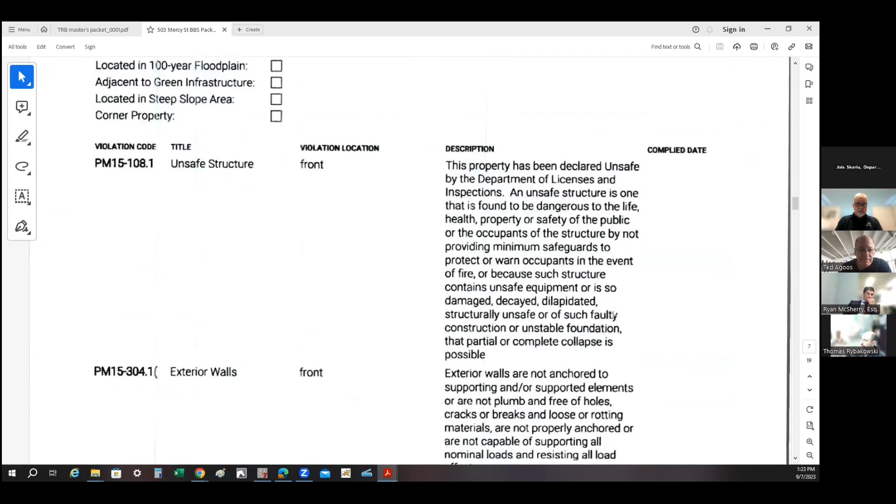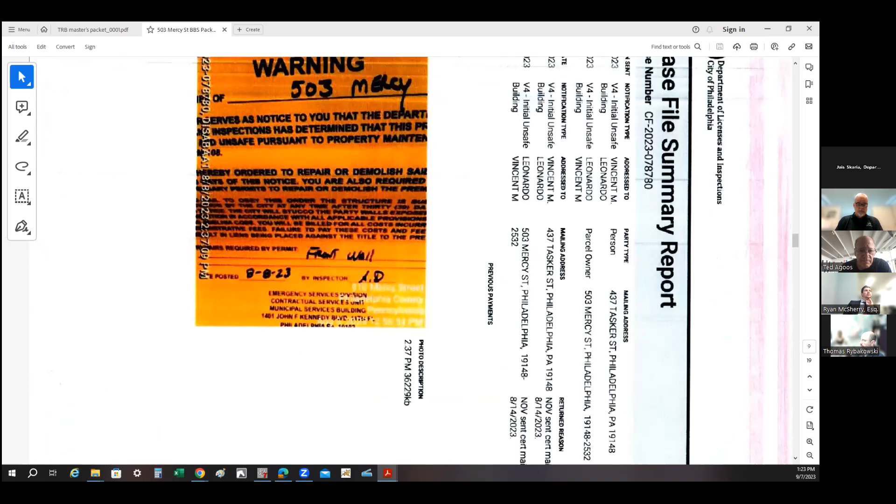That's a copy of the posting of the front of the property, 503 Mercy. And then this is a photograph of the front of the property. Like I said, it's very hard to show a bulge in the front of a masonry wall. But there is a bulge in the wall that was observed by the area inspector.

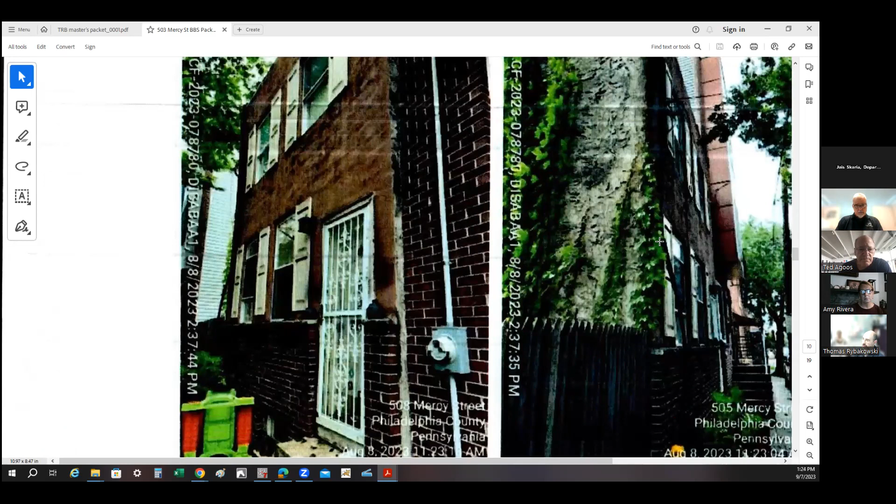In fact, the area inspector did speak to the occupants in the property at the time that the notice was posted at the property. Like I said, we would be looking for the permit for the repair or the engineering report illustrating that there is no unsafe condition within 60 days. With that, I'll rest for the time being.

Vincent, do you want to kind of respond to that or have us clarify? I just wanted to clarify that he did not speak with us the day of the violation. We were actually at home, and he provided the violation without even making us aware of it. Once I got the violation, I called him, and he wasn't in the office, so I had to call the next day, and then I just wanted to clarify that point. But yeah, I'm happy to. I prepared a statement. I'm happy to read that off if that's appropriate.

Yeah, you can certainly do it. I guess just, given what you wrote in your appeal, this is something that we do need to have an engineer make the determination of whether it is or is not an unsafe condition. So are you prepared to engage an engineer and have them come out and do it? We can't just. Well, my understanding is you guys need a preponderance of evidence to make this assessment.

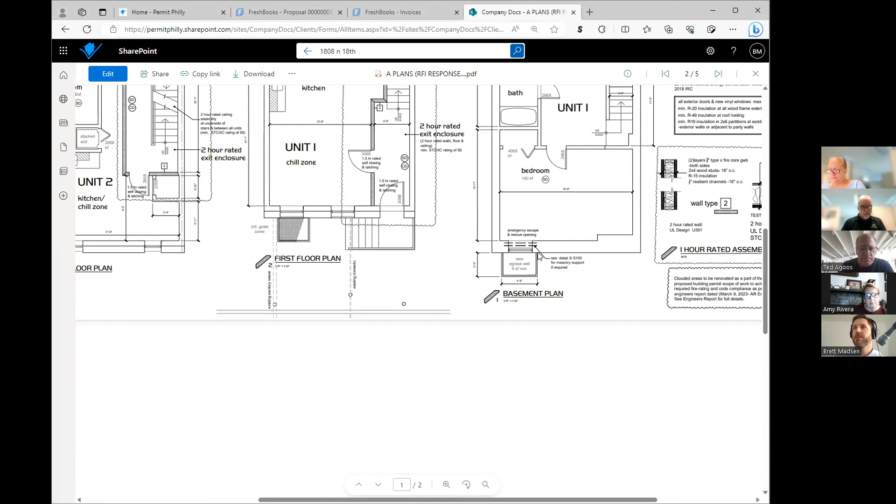This is what had to be changed. Previously, this enclosure was not properly rated. You can see that all through the corridor here, here, and here. There was also an egress well, a new egress well proposed for the basement bedroom. Essentially, everything else has been laid out this way for some time. The big change that I mentioned, the bay window, is over here.

This is on the second floor, I believe. Yes, second floor, and these are the new walls. It's very similar to the bay window that was there before, but the square footage is slightly different. That's the only change in floor area.

And that bay does not extend beyond the third floor nor the first. So this side where it says second floor plan is the front of the building. So this is actually within property lines.

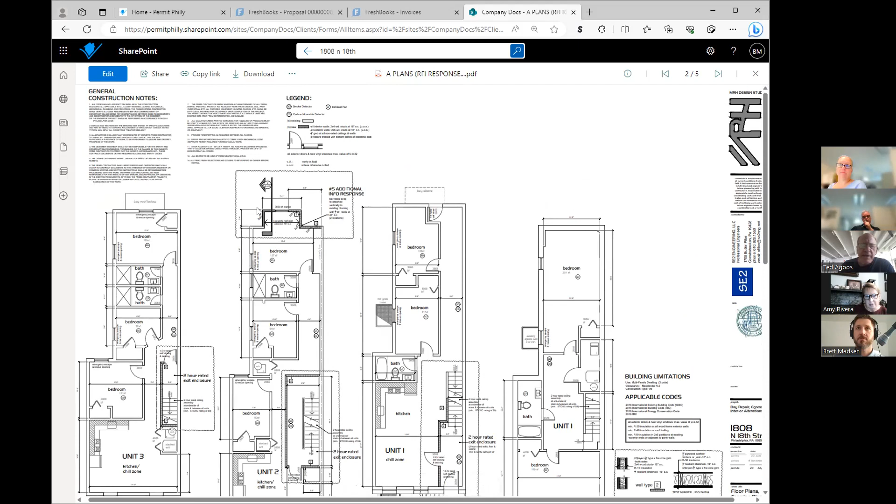It's over a parking area. But assuming all three floors are lined up, it looks like it does not go out any further. Yeah, the plans aren't aligned, so that's why. I didn't know if the front maybe doesn't align with the front. No, Ted's correct. So we have the third floor here, right? You see the frontage? It's dashed in, dropped on one side for some reason. I didn't draw the plans, I'm sorry. And then raised back here, but the distances are all the same, just placed slightly differently.

It's also worth noting, I'm not sure if you have this in the records, but this was brought to you before. At that time, the architect had a note that sort of allowed them to see if the assemblies were fire rated, and if not, cover them. The Board of Building Standards requested that we make a determination, have an engineer look at it, determine whether or not the existing assemblies were 2-hour fire rated or whether they needed additional protection. And they definitely need additional protection. So that's changed from the last time this was presented. There will be 2-hour fire rated drywall installed all along the walls of the exit corridors.

So the refusal only says an existing fire area increased by the addition, which I believe is the bay. Shall comply with Chapter 9 of the International Building Code. Yeah, that's correct. So that's not that we're here to talk about egress wells.

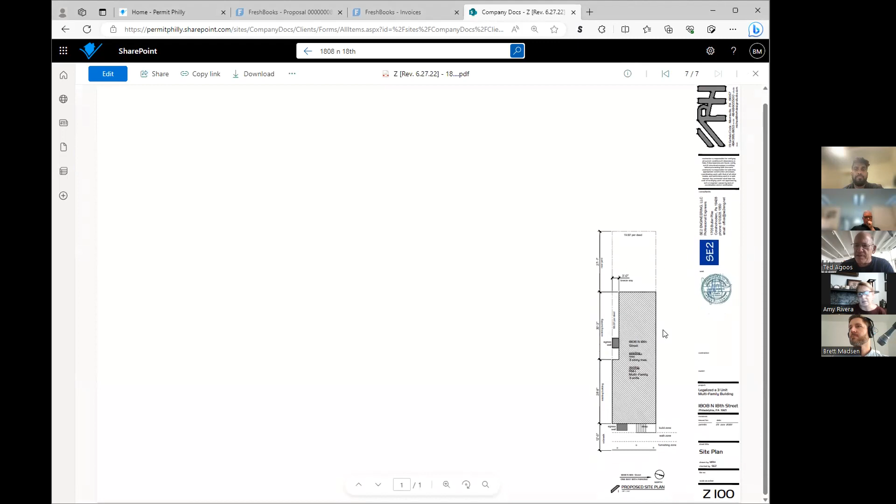Honestly, this one has been going on long enough that I forget. Let me look at our permit documents here, because what I see, this refusal only says because of the addition - it's an increase in the fire area because of the addition. Yeah, that's correct. We're not trying to legalize it - I was going by what Brett was saying, but my system is back up and running, so I'm just going to double check to make sure.

And just a question, if you can multitask, Jace - if this increased the fire area, would that require just the increased area to be sprinkled, or the entire building? If they don't separate it, then the whole building needs to be sprinkled.

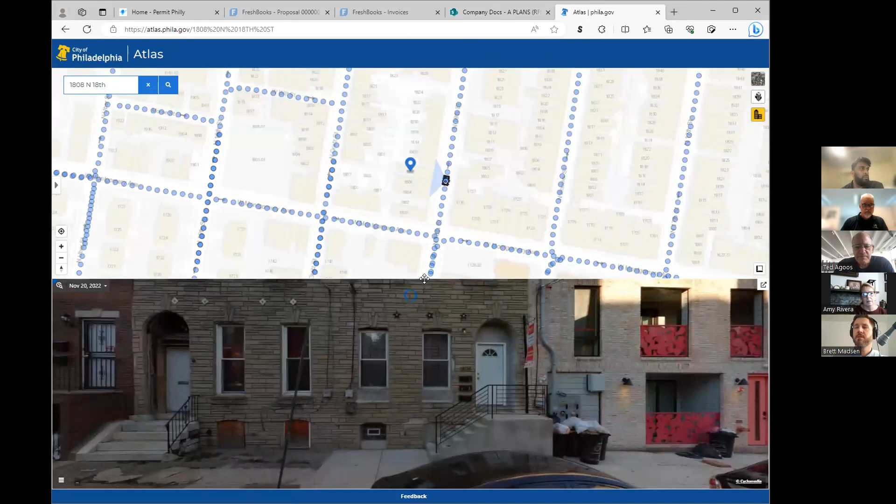Well, that's why I'm asking to see pictures, maybe from the backyard, of the bay before it got torn down, and then the reconstructed bay. And do we have historic photos? Luckily, they are easy to find on Atlas. Let me pull up the rear view - actually, because there's an open area back here, you can see, yeah, so this is our 1808 right here.

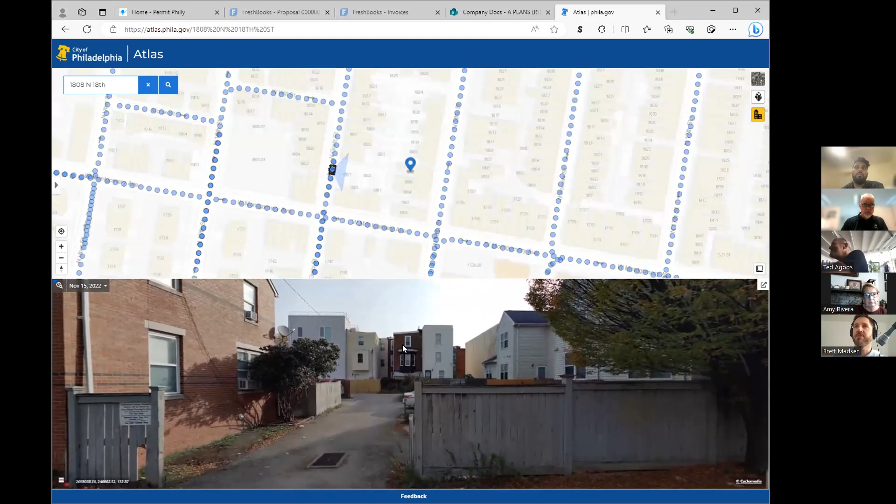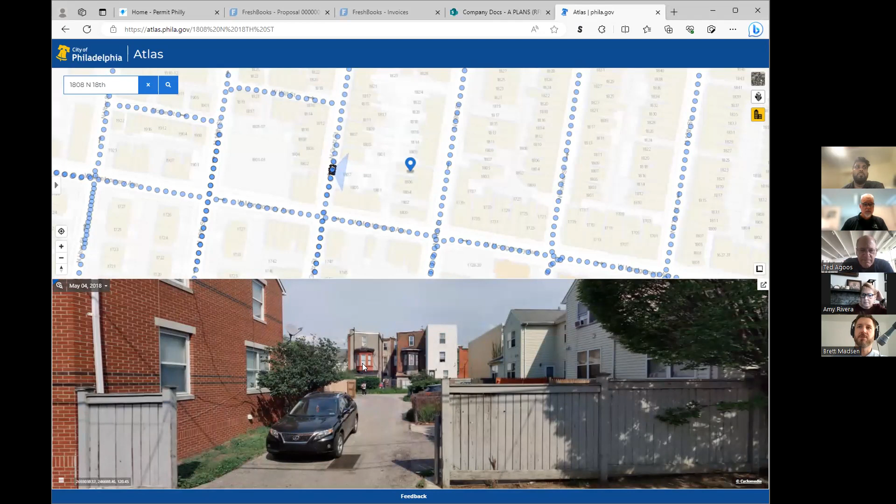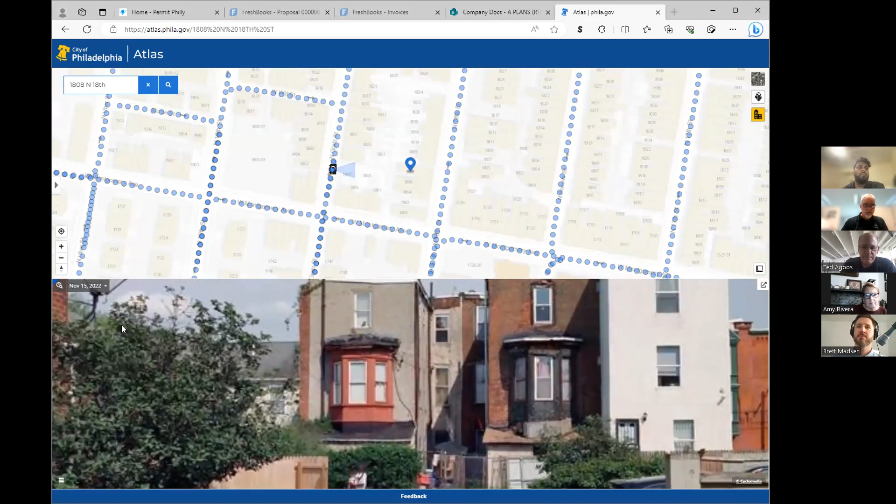The previous zoning permit says that the new bay window is actually larger than the previous one. That's what it says in the zoning. So it doesn't look like it, but it works out to a little bit more square footage. Does it project further, or is it the same projection? It's just that it's squared off, so it's a little more area.

It's squared off, so it's a little more area, and I think it might be slightly longer. I haven't looked at the zoning plans in a while. Sorry, I was prepping for the building portion here. I can pull those up if you want, or look at the approved zoning plans we have. It doesn't look like a very significant projection if it's not.

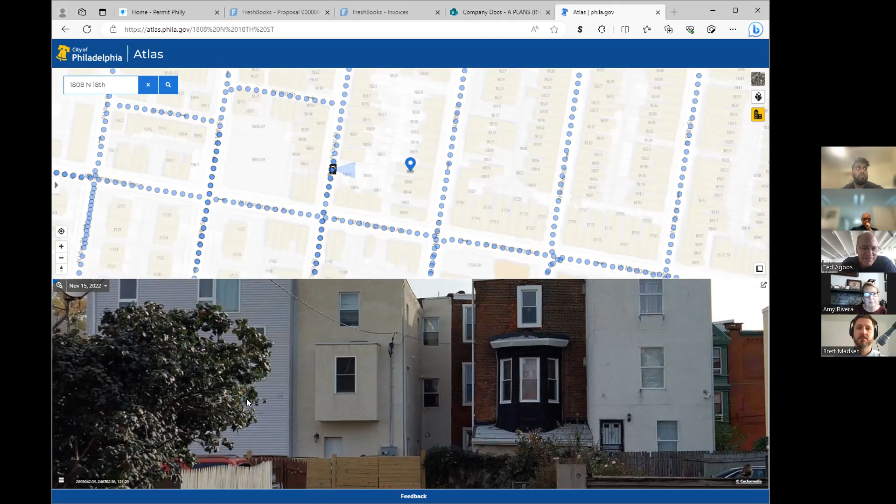It's not. The changes in all dimensions were pretty minor. And you reduced area on the first floor. You took off that shed off the back. Yeah, that's correct. So now here's our first floor here.

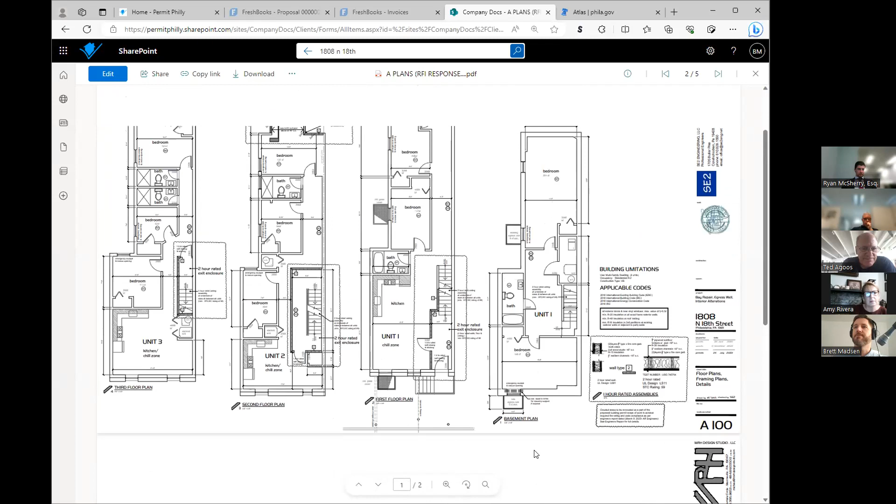There are previous permits on file showing a bump out on the third floor level. I'm guessing that scope was canceled and the new scope was just for the second floor. Correct, Brett? Yeah, there's only a bump out on the second floor. There's no third floor bump out proposed here.

Yeah, it looks like it was previously issued out as a 3-family dwelling based on the previous zoning issued in 2022. So all it is, is just this little bump out on the second floor level. Technically, it's an addition, so that's how.

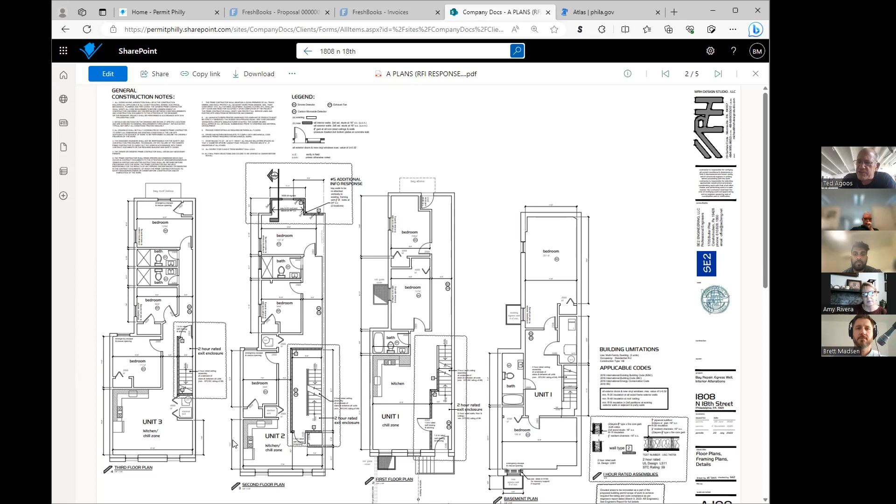Could we talk this through, or John Dimes, do you want to chime in anything? So if I understand this correctly, that bump out is the addition? Yeah, that's correct. That small little bump out, that's what's triggering the sprinkler system? Yeah, yep, that's correct.

Yes, the bump out replaced an existing bump out. And this is an existing building, nothing else is being done, and they're proposing to add fire rating between units upstairs? That's correct. Yes, on the corridors, yes.

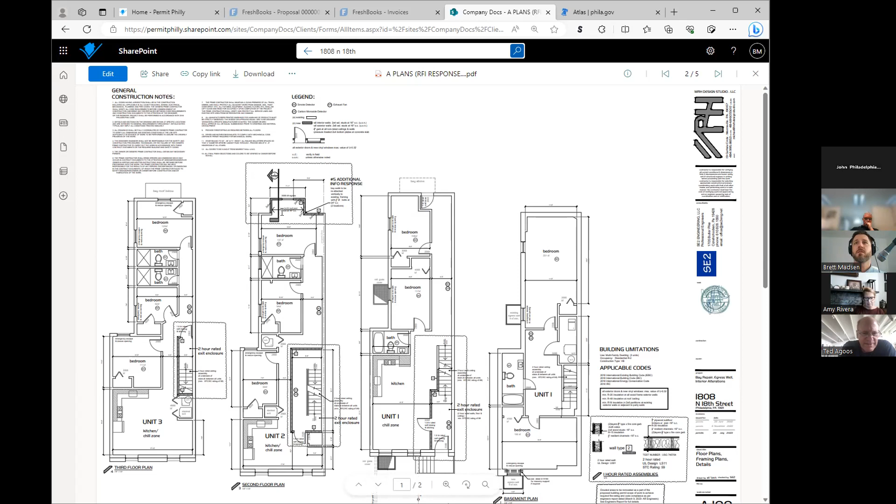And what's the square footage of that area? Of the bump out itself, or the one which is triggering the actual call for the sprinkler? It's about 28 square feet. Yeah, 24, well, maybe.

And John, what was there before? A window bay. Yeah, there was a bay window. And with the overall truncated corners, yeah, they've probably added 5 square feet total.

Right, yeah, I wouldn't be adverse to anything the board wanted to do. I would be fine with it, given what it is, and it's an existing building, and it's such a small addition, I think it's negligible in its effect on the property as it currently is.

It isn't like they're adding on a room or anything like that, so. And I tend to agree that it's really just replacing a bay. Yeah, I would as well. I think I'm comfortable with this.

We grant a variance to relieve them from the sprinkler system requirement for this small addition at the rear. Right, and that's the only cited item, correct? Yes. Okay, well, what happens is I think we make the recommendation to the commissioner.

And if he concurs, you should hear in a couple of weeks and get a decision letter. And the plan examiner will at the same time. Okay, that sounds great. Thanks. Thank you. Thanks for joining early.

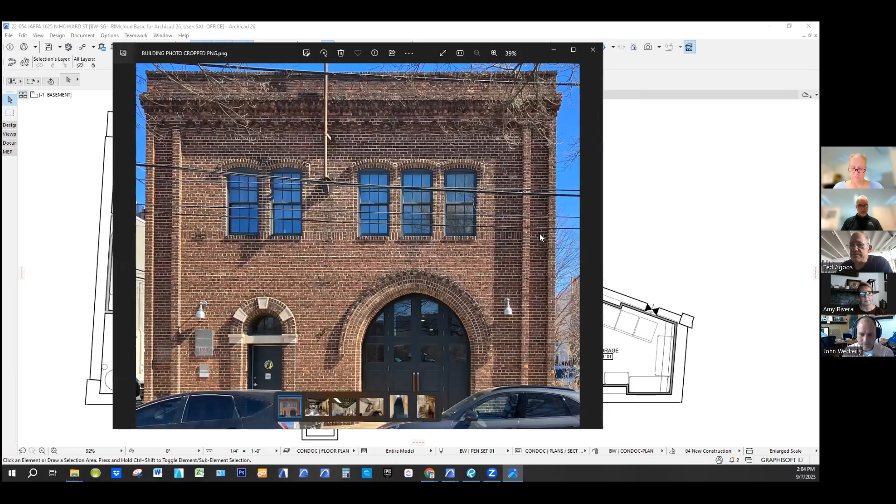So just wanted to start with some background information to show some existing conditions, photos of the property. This is a view, as many may know, it was originally a firehouse that has had a number of previous uses. Most recently, when we started working on the project, it was zoned for assembly or restaurant use on the ground floor and was operating as a business on the second floor.

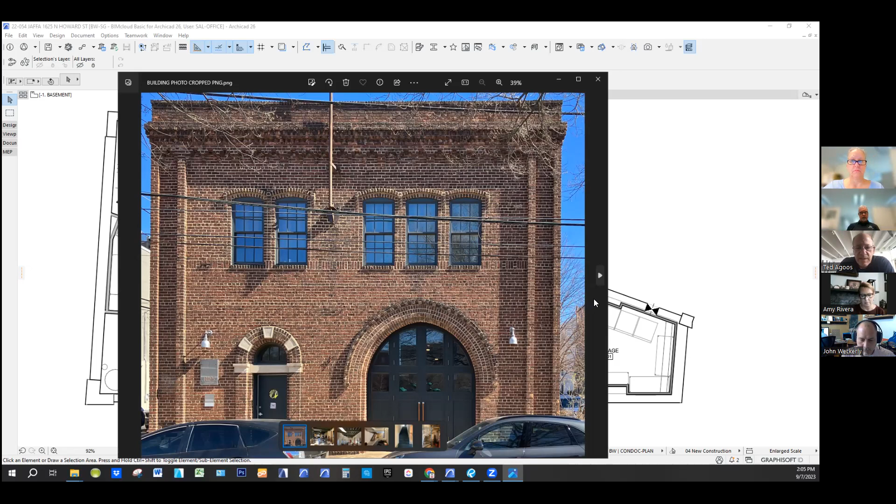So this is the view on the west side of what was the original access point for the firehouse. This is the view on the inside looking west, so you can see the garage door that was in the previous photo off in the distance there. Kind of to the right of Sal, and behind him is the existing stair to the second floor.

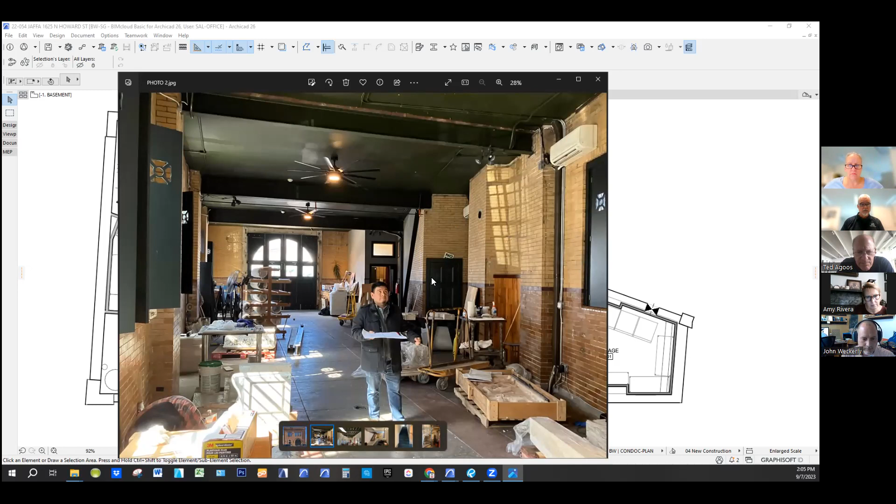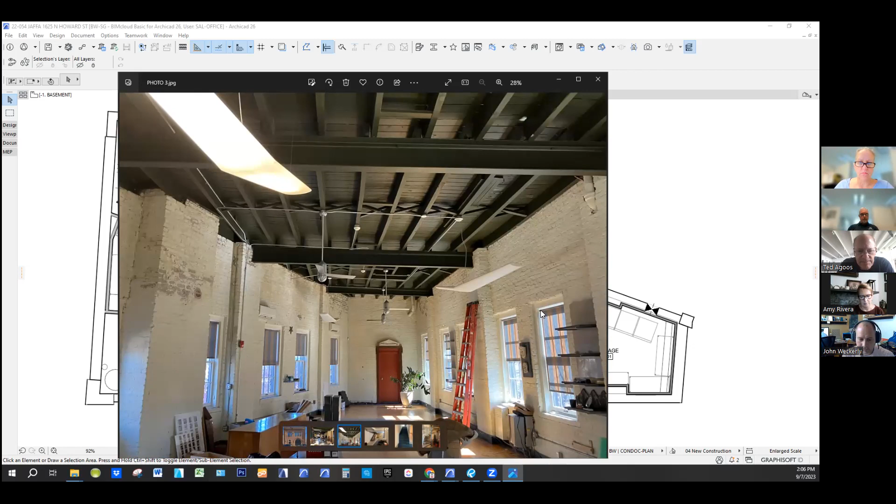This is just the overall context image. And then this is a view on the second floor. Kind of once you come up the stairs, this view is actually looking east towards the more narrow portion of the existing structure. That red door at the end provides access to a stair, a spiral stair that gets you to the roof, but does not go down to the first floor, which we'll look at later in the plan.

And then this is a view showing the basement and the existing stair that leads from the ground level to the basement level. Is that everything, Sal, on photo? And then this is a photo of the first floor stair that leads to the second floor, the existing condition.

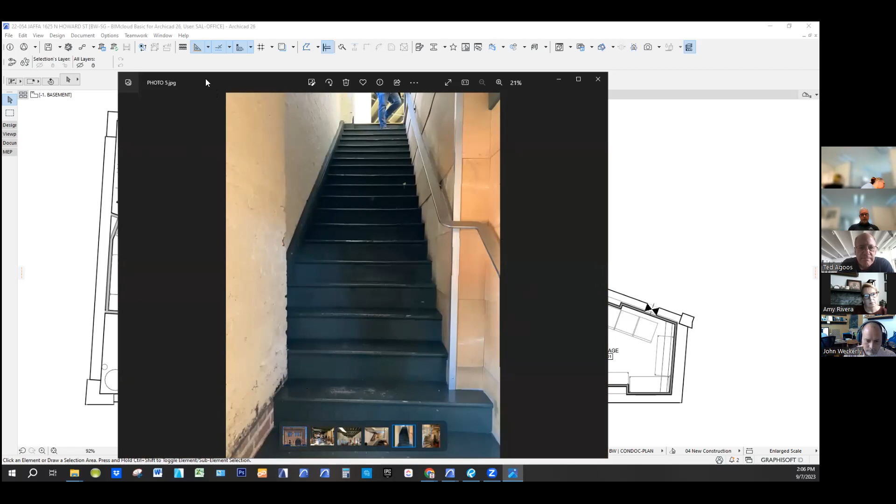The refusal and appeal is a bit of an overlapping request based on the unique shape of the existing structure, which led us to work to resolve how the customer and the operation would move through the space both vertically and horizontally, given the unique shape of the building, as well as the location of the existing entry points to the building.

The plan in front of us now is a plan of the proposed basement level. There is, as you can see here—let me annotate this, sorry. So this is the point with which you access the stair to go up to the first floor, which you'll see in a minute on the first floor.

There is, for reference, an existing access point to a Bilco door on the basement level that is at the second location. There's also another Bilco door that lives behind this restroom that we're proposing there for reference. And then I believe, lastly, there was this well here—over in this corner, I believe it was a coal chute or something to that effect, that is existing in its condition and I believe floored over at the sidewalk level.

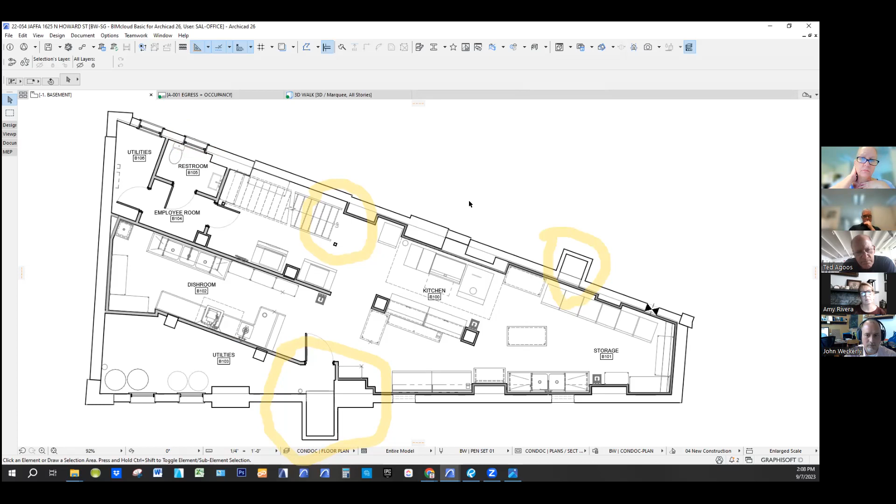And then just a bit of operational information: utility area in the lower left, where the utilities are being proposed either to come in or are existing. We're showing the sewage ejector pit location as well as the Oilmatic fryer tank in that corner.

Dish room directly above it for dishwashing. Immediately to the right, you can see the main kitchen area where the hood would be located, along with refrigeration and prep area. And then in the upper left-hand corner would be an employee restroom, and additional space where the existing electric panel is, in that top northwest corner.

What's the maximum number of people who would be working in here at any given time? On our permits that were submitted, we have nine occupants in the basement as a maximum allowable.

So moving to the first floor, you can see here where I had referenced the basement starts, going up. This is the access point to the basement from the first floor down. And this is our proposed access point to the second floor in terms of the reconfigured stair to the second floor.

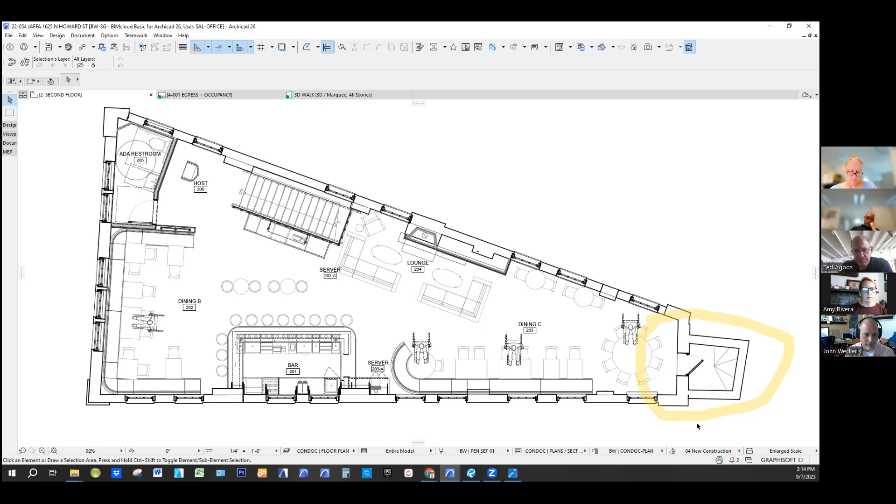Overall square footage of each footprint is 1,500 square feet of usable square footage for the basement, ground floor, and second level. Occupant load on the first floor is 59, and occupant load on the second floor is 71.

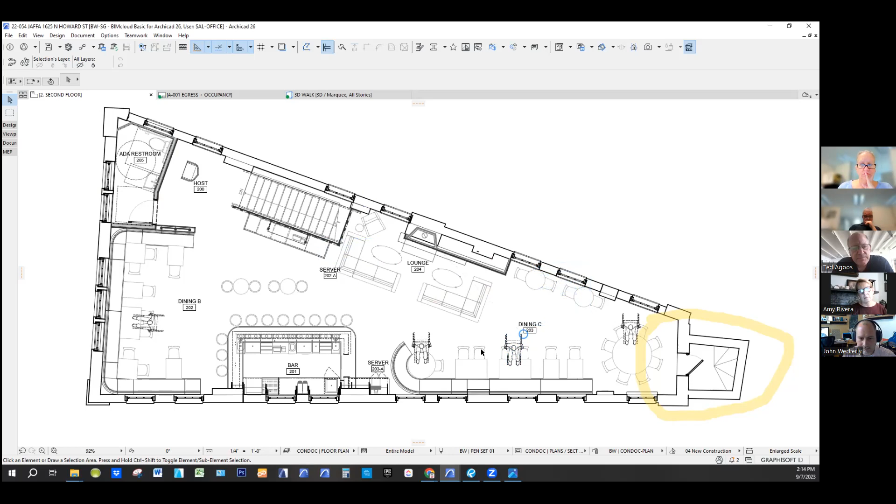We're requested, so the refusal is based on the fact that it's an interior. In essence, we're proposing to reconfigure the existing stair to create, from an ADA perspective, a code compliant 7-inch rise, 11-inch tread communicating stair, flipped the other direction from the way it is now, to include a landing from the first floor to the second floor.

The client's goal, as you can see, is one of the reasons why the language in the refusal is based on the stair being open from the basement, first floor, to second floor. As you can see in this area, the goal for the client was that since the kitchen lives in the basement, their operations is such that both culinary product and dirty dishes will flow vertically up and down through that location, which the hope was could stay open in an effort to make that process more seamless in terms of employees passing, both coming up the steps and going down the steps.

Sal and I were discussing whether there would be an opportunity to have a door on a magnetic lock, pinned to the fire alarm, to enclose that stair to the basement while at the same time allowing it to be open operationally, but closing if need be, to create a condition where we no longer had an open stair from the basement to the second level, but rather an enclosed stair from the basement to the first level, aside from operationally the door being open, minus a life safety event where it would close automatically. As you can see from the shape of the building, our hope is to have this.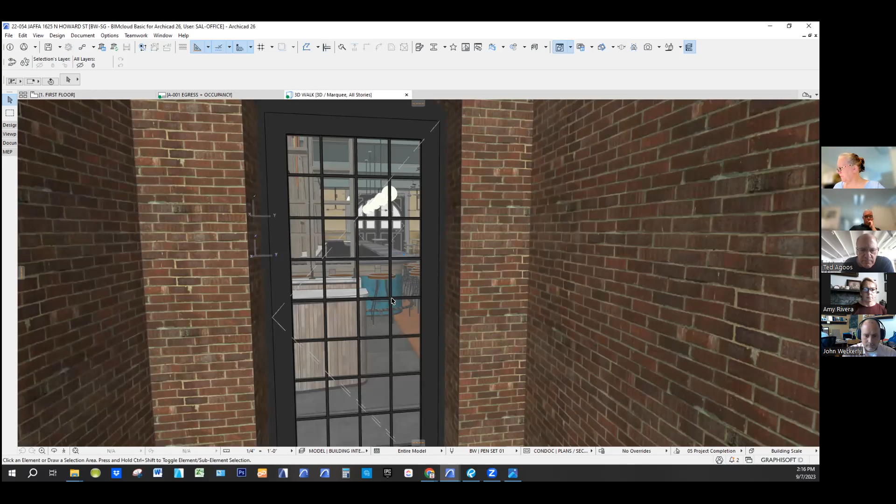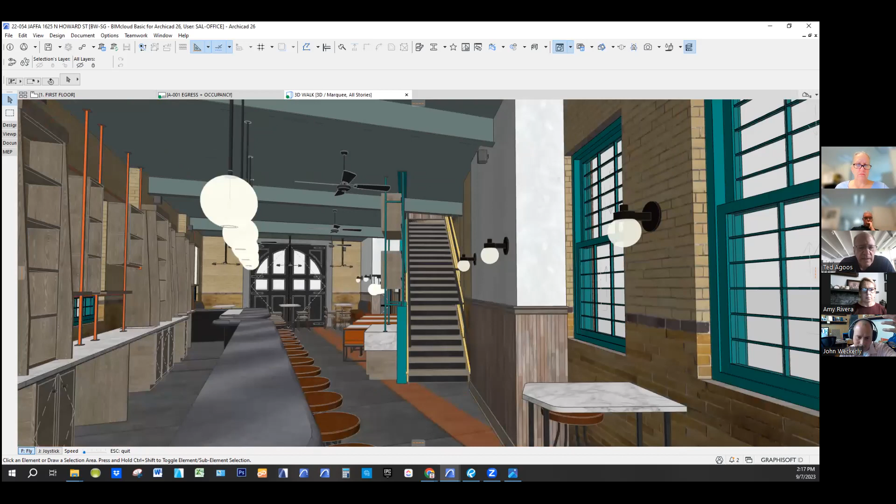So when you come into the space, you can see it's relatively tight at the entrance point on the eastern side. Our proposal, in an effort to make the space inviting and let customers know there's dining activity on the second floor, is to have an open stair as an architectural feature that provides connectivity between the first and second floors.

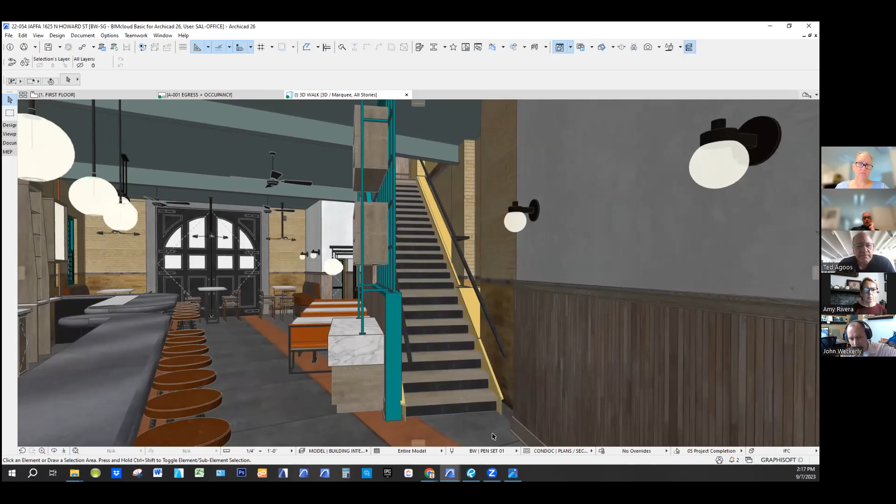In plan view, the distance from the stair to that exit door is approximately 34 feet on the east side. It's similar, maybe a little longer, to get to the door on the western side. But for all intents and purposes, it ends up dumping down into the center of the first floor with the opportunity to go either direction.

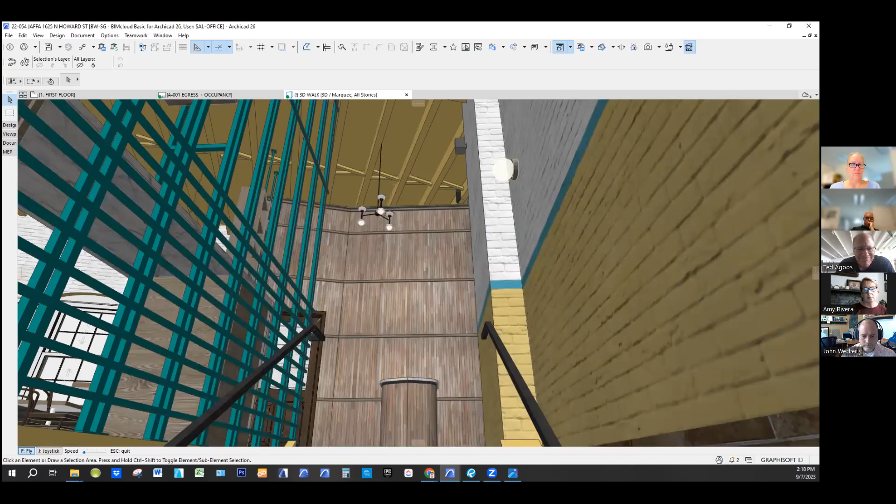And then on the second floor, if you go up, Sal, the bathroom's there behind that tambour wall, and then come around you see the bar, the smaller bar. If you go south, can you go to the eastern edge and look back? Okay, just spin around there. And then you can see the stair.

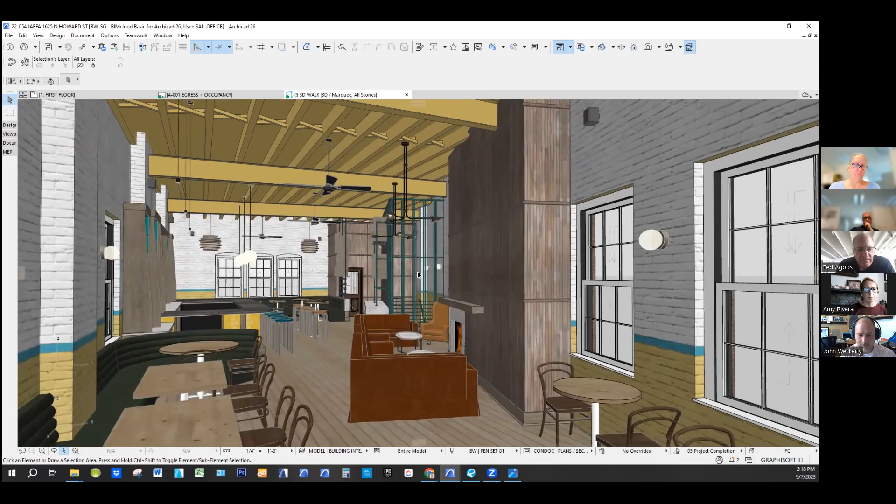Our hope was to avoid having that fully enclosed, given that it's already a small footprint, to avoid the physical imposition of having that stair be a rated enclosure.

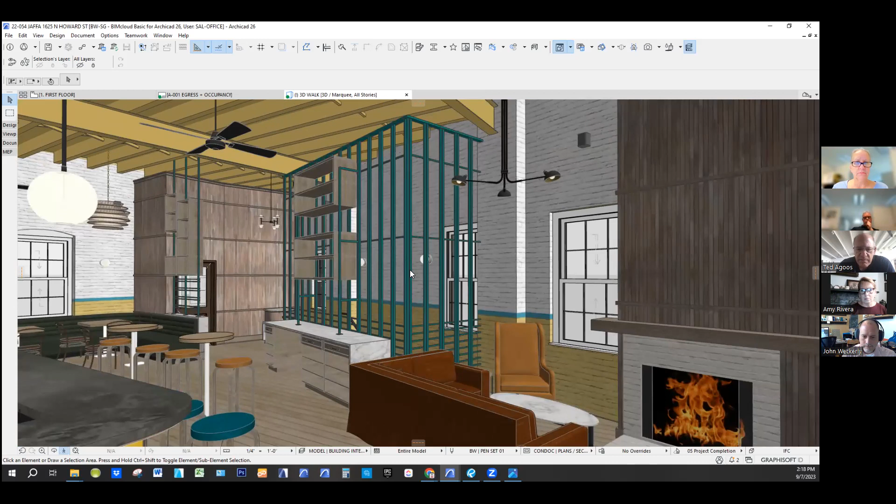Happy to answer questions. Yeah, a couple of quick questions. Is the intent that the second floor will essentially be set up at the beginning of any meal service, where you're not running stuff up from the kitchen constantly through the first floor on that stair?

I could certainly ask our client what the operational game plan is for that. I would assume yes, that they're going to make provisions to reduce the amount of vertical travel from the basement to the second floor as much as possible. Meals, actual dishes that are ordered, would need to travel vertically, but if there are other opportunities to prep, I'm sure they would do so.

And I see on the second floor there's a lot of ADA elements, but there is no lift. Is there any plan or thought of ultimately doing that, or what's the thinking? I think the idea was that we would accommodate the elderly or the blind — we're just showing the ADA seating for that purpose.

Well, given the size of the requirement on space, the ground floor— Yeah, we have some. Given the size of the space, our goal there was to really just show compliance to the extent we could in terms of number of seats on this floor, and providing that accommodation. It shows as a wheelchair, but the accommodation is there to receive folks who might have other disabilities that need that real estate.

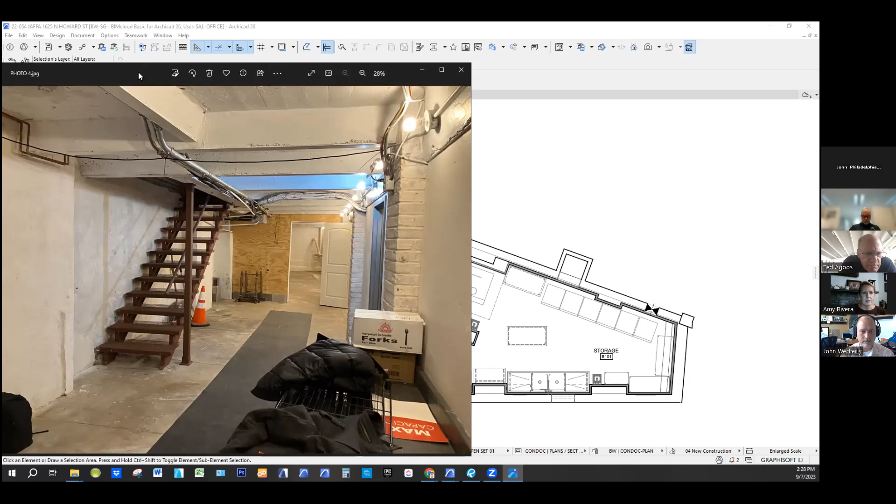So yes, I'm sorry, I didn't comment on it, but if that idea of making the exit directly from the basement to the exterior on the first floor was desirable, then yes, we would enclose the stair entirely, which would eliminate that notion of the one refusal point being that it's a three floor open stair. If we enclosed entirely the basement to first floor, then we're really just talking about the communicating stair between the first floor and second floor as being open.

All right. Ted, do you want to caucus?

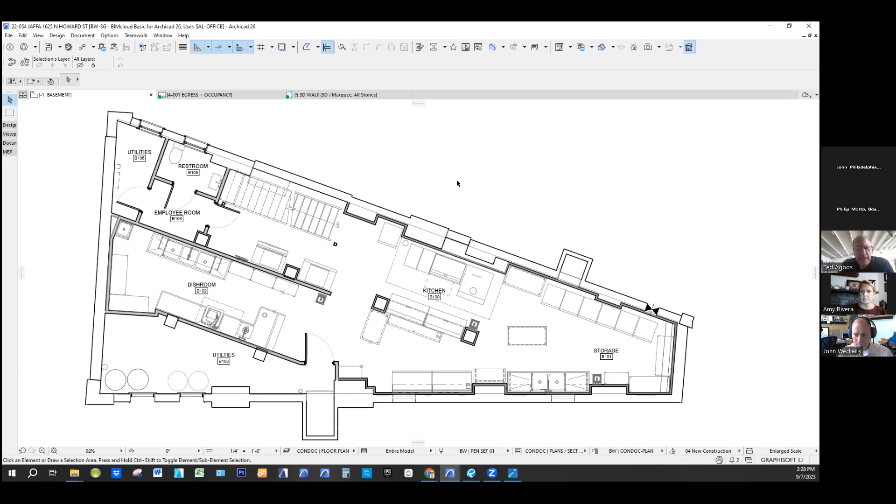Yeah, and I did just have one last question for John. If you go to the second floor plan for a sec, I understand the objective in terms of keeping that stair as open as possible and the feel of that floor. Would there be any benefit in any kind of glass valance or whatever in terms of smoke migration to the stair, in terms of enclosing that? And a variation on that is if it was a glass enclosure essentially, with again a hold open door, does that help even more, or are any of those things just not going far enough to separate that floor?

Well, if you're talking about egress on the second floor, I mean, you still have a travel distance from sitting on the back of the second floor. There's no way to get out. So yeah, I mean, if you still got to walk down the steps and you're walking into a smoky environment because there's no other way out of the second floor, I don't know if that helps so much.

I mean, we can always do a couple different scenarios or an infinite amount of scenarios of what could happen and what ifs, but yeah, I think there's an issue they have to overcome by finding a second way out, given the conditions on the first floor, understanding that the potential for fire is greatest in the basement, and we're trying to isolate that as much as we can. I don't know what you just proposed helps that much with regard to getting out of the building. It might help temporarily with maybe some transfer of smoke, like it has a chimney effect there.

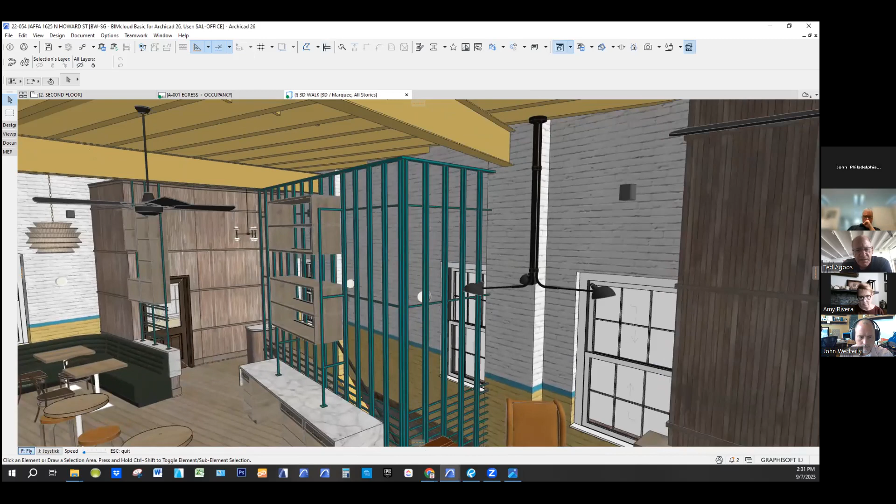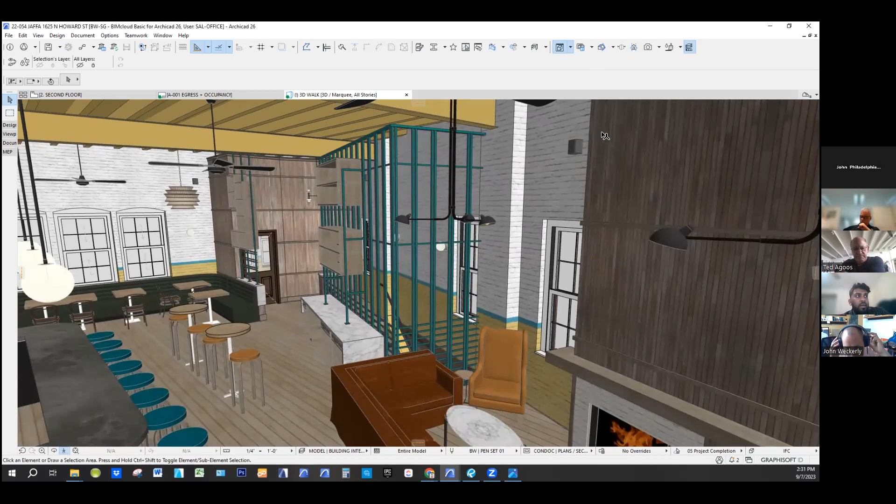I guess I could talk to the board while they're looking for that. I'm not sure, John Weckerly, I don't know whether you talked to Fred about this or not, but when you said the previous use was a restaurant on the first floor level and a business use on the second, when we were looking in the history, there's only a zoning permit obtained, but no building permit obtained for that. So we're back to the last legal use, which was either a single family dwelling back in 1986 or a firehouse back in 1953. So it would be a complete change in occupancy for this building, unless they got building permits that didn't show up in our system. We looked at different addresses because this kind of fronts three streets, so we thought it would be under a different address, but when we looked at it, we didn't find any other building permit besides that zoning permit. So the last legal use was most likely a single family dwelling or a firehouse.

So interesting. Yeah, my comment was based on a conversation I had with the previous owner when our client was in the process of transitioning to ownership. A zoning permit was obtained, but a zoning permit really isn't anything until you actually get a building permit and a CO as part of it. Understood, just want to look at the board. Understood.

Did you get that height approximately? No, I think what Ted is asking is the height from the sidewalk to the parapet or to the roof. Yeah, from one of your photos, you could probably approximate it.

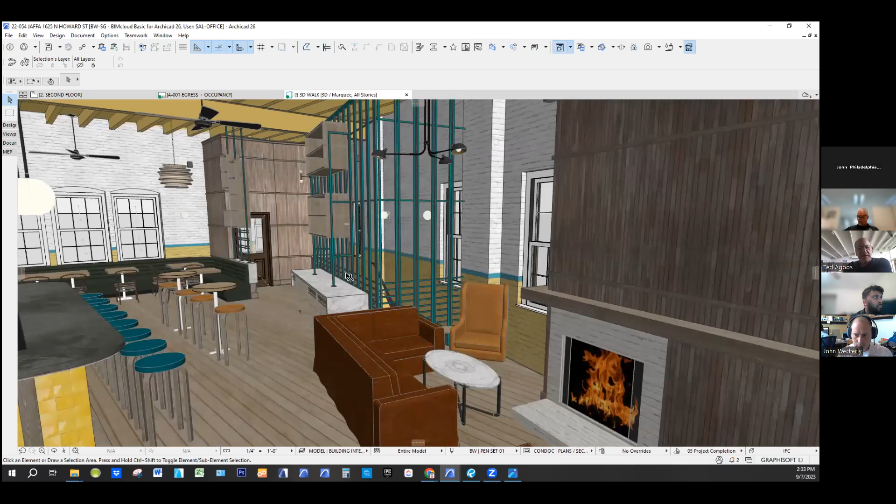So just to recap while they're looking at that, they need 2 exits from the second floor level. One of the exits has to go directly to the exterior, and like I said, the 2 exits. And the way we review that is because it's a complete change of occupancy from Chapter 10 of the IBC.

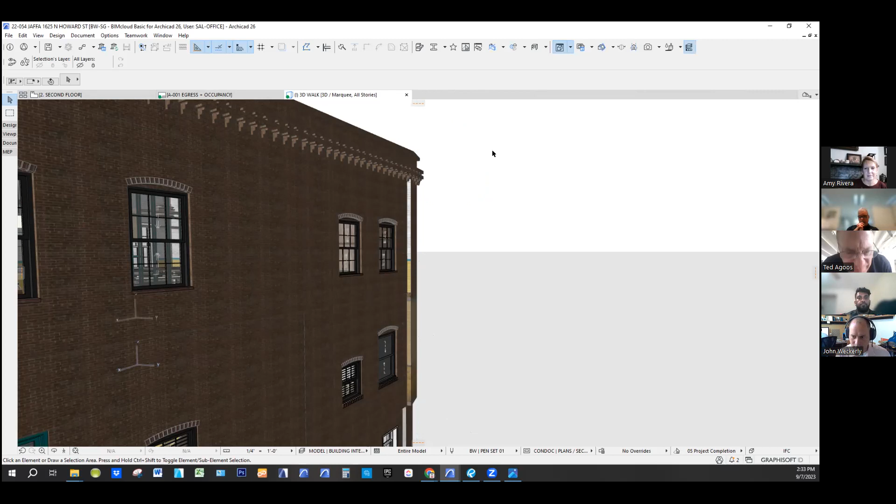And we're assuming that this is covering essentially 100% of the lot, other than a little bit at the vestibule, at the tip, right? Yeah, I think there's a very small patch of grass on the east side there that's maybe 6x7 or something, and it goes to a point or something like that. But otherwise, it's full lot coverage.

31 feet 4 from the parapet to the sidewalk, plus or minus an inch or so.

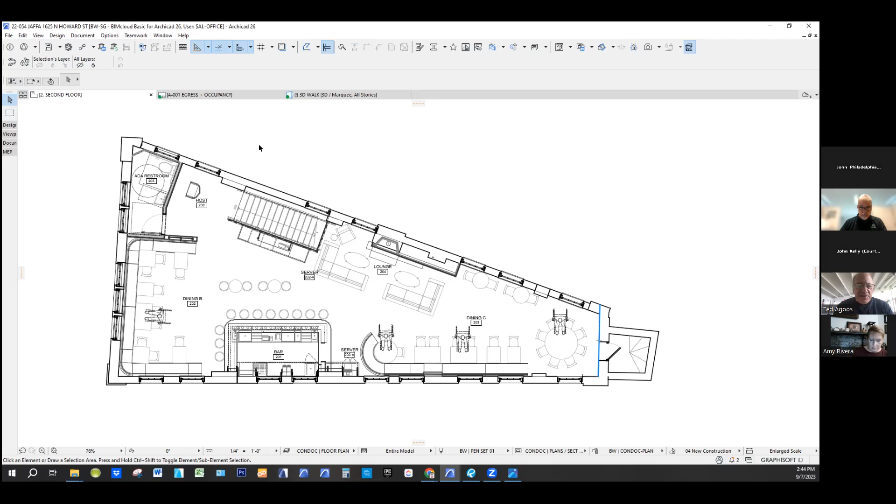That can be on a hold open. We would want to see some kind of a smoke shelf on the ground floor at the stair to minimize smoke migration. So that would be around the stair so that smoke would be limited in terms of going up the stair to the second floor somewhat.

And we think there needs to be an exterior egress stair, non-combustible, leading from the second floor to the sidewalk. We took a look and there's like 13, almost 14 feet. I'm sorry, almost 13 feet, a little over 12, on the, I believe it's Turner Street side.

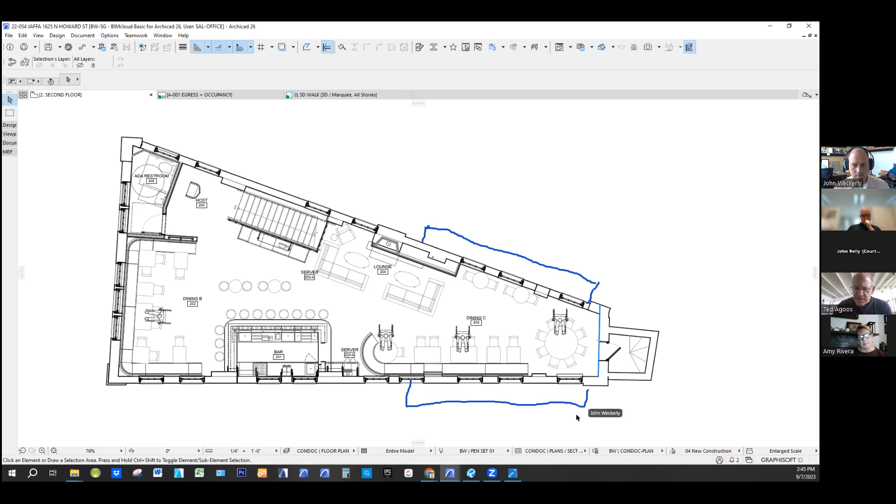Where, and I'm not sure, you have to look at where best to do it. Most likely the area where that round table sits, the window out there, going out and then leading down. Actually on the other side, Amy. No, that was me drawing. Oh, sorry. Yeah, either or on the downside. I believe that's Turner on that side, correct? And Cecil B. Moore is the angle. Yeah, you're right, Cecil B. Moore is the angle. Yeah, so it's basically there.

We talked about whether that might be something that could be fixed at the second floor, but lowered to the ground floor. And we really feel it needs to be—you're not allowed to do a fire escape, but you are allowed to do an exterior non-combustible exit stair. And that seemed to be the logical place that might happen.

Understood. It'd be 3 foot wide, I believe, Jace, is that the required width that would be needed? Yep, it'll be 3 feet, but then I would just look at the code section for exterior stairways. You'd also need to get a variance because of the proximity of lot line location.

So I think that would be a variance given by the board. The fact that it's actually over the lot line, that's the question. Right, yeah, you just need to get streets department approval for that.

And between the kind of walking zone and building zone, this may fall at—it said 12.75 is what Atlas said, so it leaves 9 to 10 feet there. There are trees, that's something to take a look at, how best to make that work. I think you would have sufficient walking zone, possibly even with the trees, but you'd have to take a look at that.

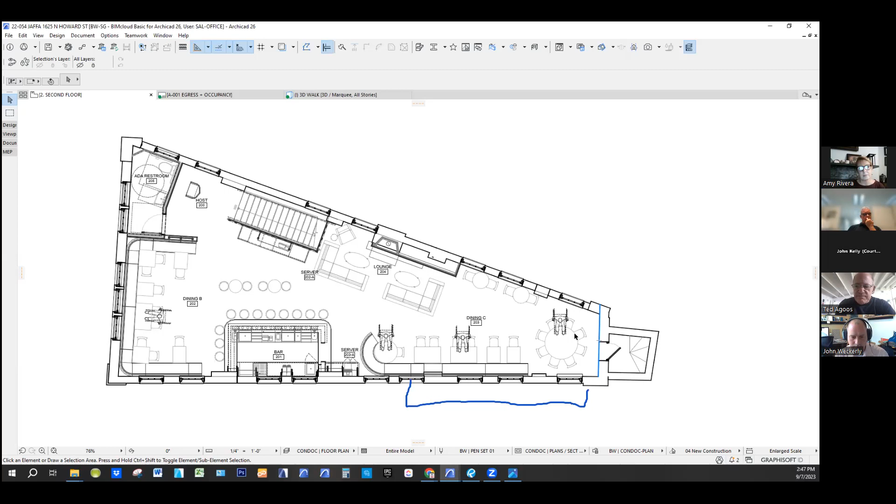But we feel that leaves the inside of the restaurant as the owner would like it, as much as we can. And I think that the walking zone issue really only happens for the first maybe 8 to 10 feet of the stair, because then beyond that you're higher and you would go back to that 12'9". I mean, I know Streets wants to see the 5 foot contiguous. You used to be able to kind of snake around the trees and stuff, but now they want it to go straight through.

Well, you guys were—we talked about it, and I understand everything you just said. We talked about, could you look at introducing the entrance on the ground floor here, and then make the spiral stair that's in the existing tower go down instead of up to the first floor. But I appreciate what the fire marshal said, that's a cumbersome exercise to try to get down in a hurry. Yeah, I wondered about that, but I don't think it's satisfactory enough.

Understood. And in terms of the vestibule, I think it serves you well coming in. Yeah.

Yeah, in this case, we took a quick look at the trees there. You'll have to take a look. I'm pretty confident that the walking zone called for on Howard Street is probably close to it, as long as the trees don't come into play.

Does the fire department have any comments on what we're proposing? No, I think it's fine. I think you need that second exterior stair, and all the other provisos seem to make it as safe as it can be, and basically meet the code. Okay, thank you.